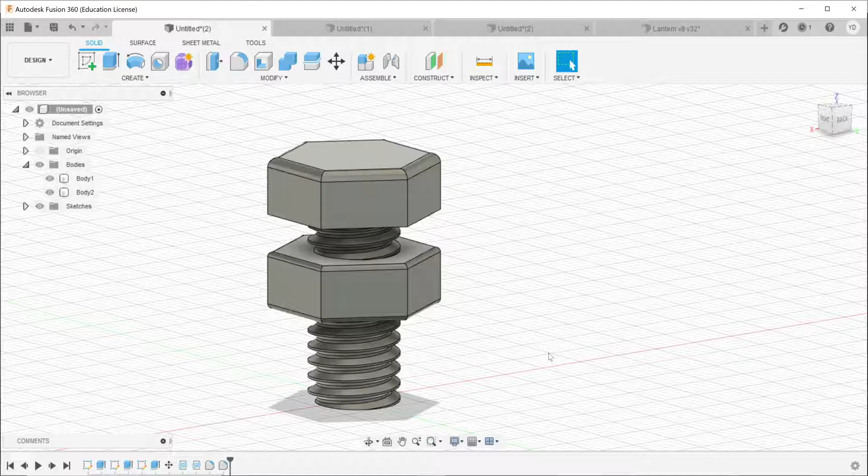Let's start with a circle. I'm going to create a sketch on the top plane, and I'm going to make a circle that's 5 millimeters, and then the height is going to be 10.

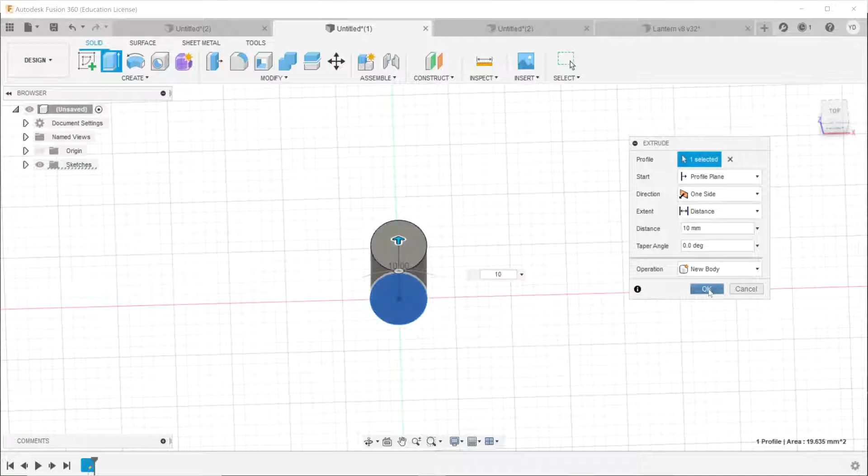I'm going to start with a cylinder, and this is going to be the base of the threads, and then I'm going to create the nut, or the piece that gets threaded onto it.

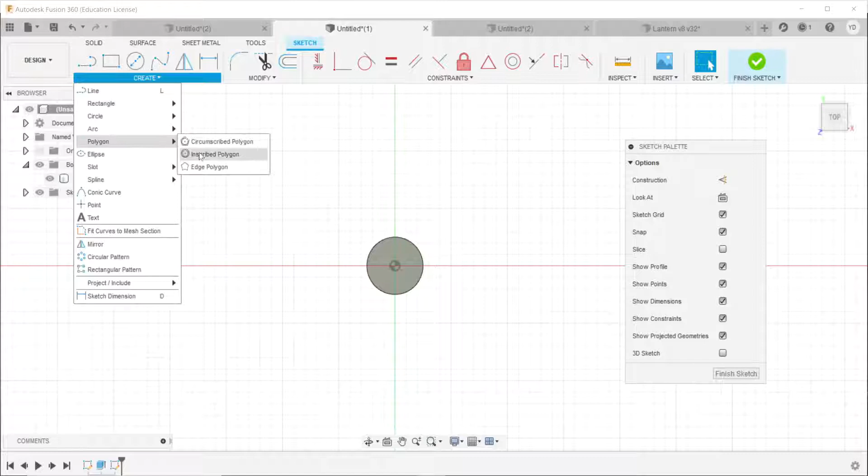Let's create a sketch on top of the cylinder, and I'm going to make a polygon that's a hexagon. I'm going to go to polygon, inscribed polygon, and use the center point to create a hexagon. But I'm going to want to extend this a little bit further.

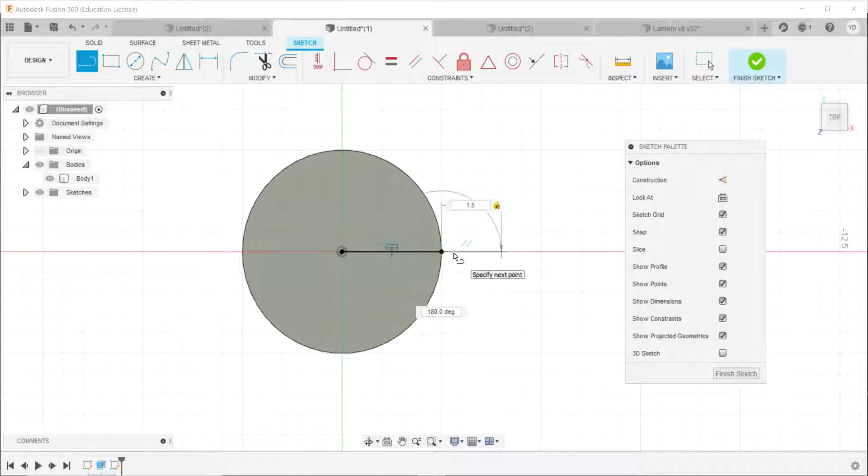To make it a little bit more precise, I'm going to create a line from the center of the circle to the edge, and then go another 1.5 millimeters, and that's where my hexagon is going to extend until. So let's go to create, polygon, inscribed polygon, center of the circle to the edge, and that should be good.

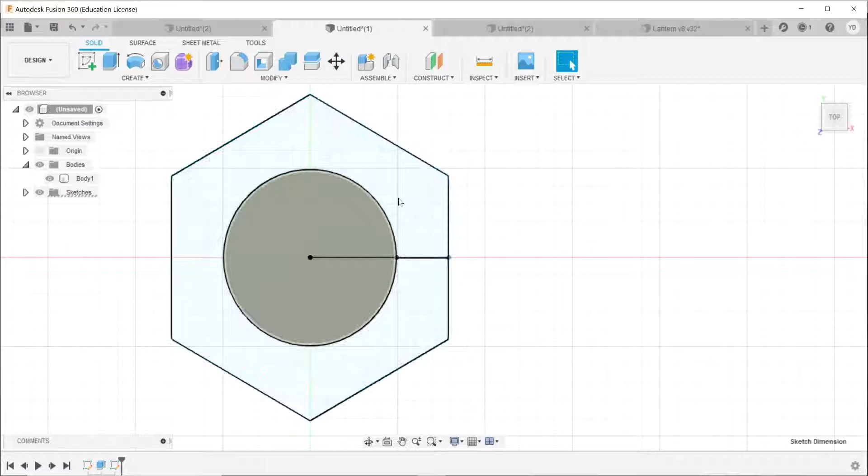I'm going to hit finish sketch, and then extrude this hexagon upwards, 3 millimeters, and hit OK. So now we have the nut and the base that we're going to thread together.

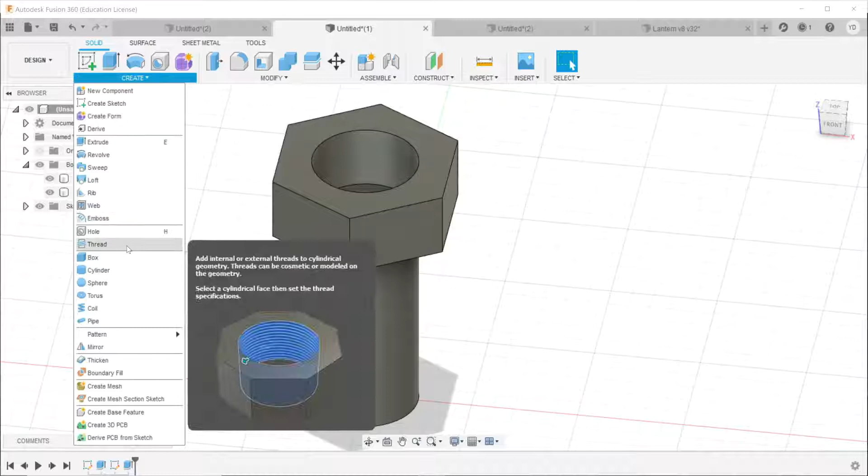Let's go to create, and let's go to thread, and then I'm going to select the outside of the cylinder, and you can see the thread design appears.

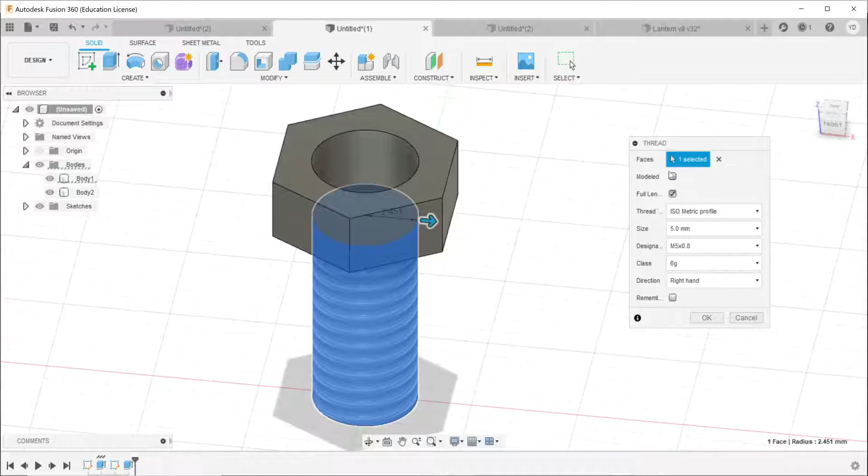But if we wanted to actually 3D print, we're going to have to check modeled. I think this happens because for Fusion 360, in order to save memory to make it run quicker, it doesn't by default show it. So in order to 3D print, we have to click on modeled.

You can see it's an M5 by 0.8 screw or thread. Because it's 5, we made a circle that's 5 millimeters. There's a lot of different metric profiles, ISO metric, based on your needs, but we're going to stick to the ISO metric. All the other settings look okay, so I'm going to hit OK.

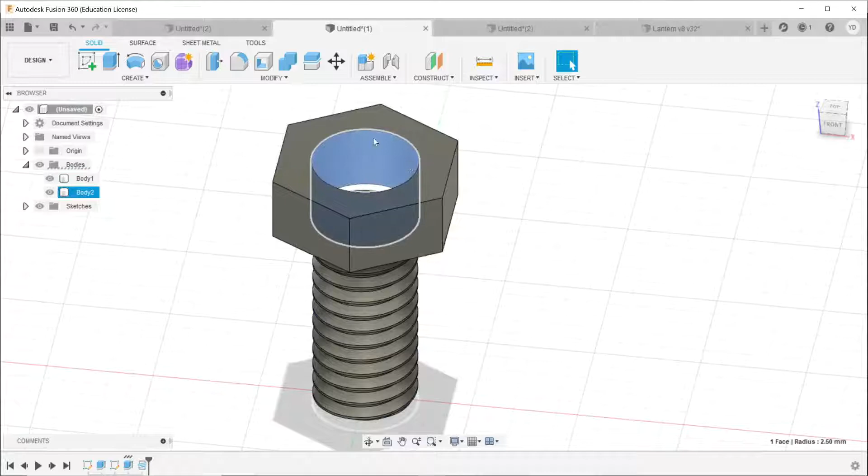That will apply the threads. I'm going to do the same thing to the inside part of the nut. Let's go to create, thread. Check modeled again, and it should be the same designation, M5 by 0.8.

That'll ensure that they're designed to come together. So let's hit OK. There are the two pieces that are going to get screwed onto each other.

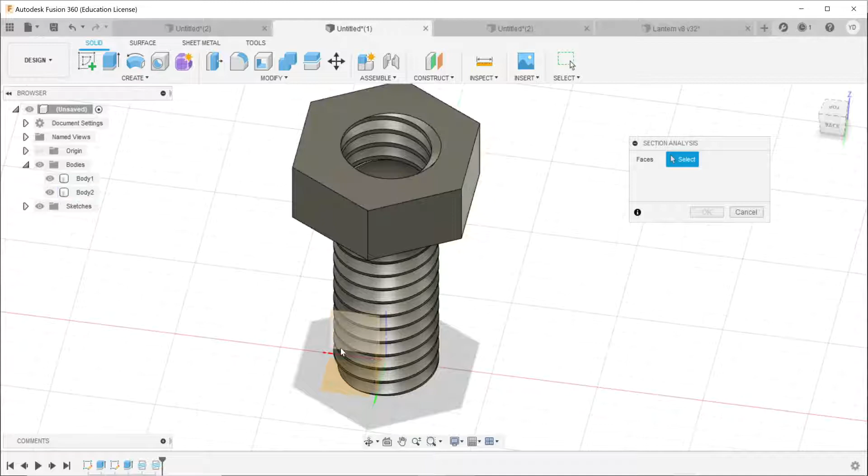But let's look at a section analysis to see how they actually come together. We'll go to inspect, section analysis, and what it's going to do is create a cross section of whatever we want in order to get an inside look at it. So I'm going to click on this plane, and you can see what it looks like on the inside.

Let's hit OK. I can turn off section analysis as I want as well, but it's a useful feature to really look at your designs from the inside.

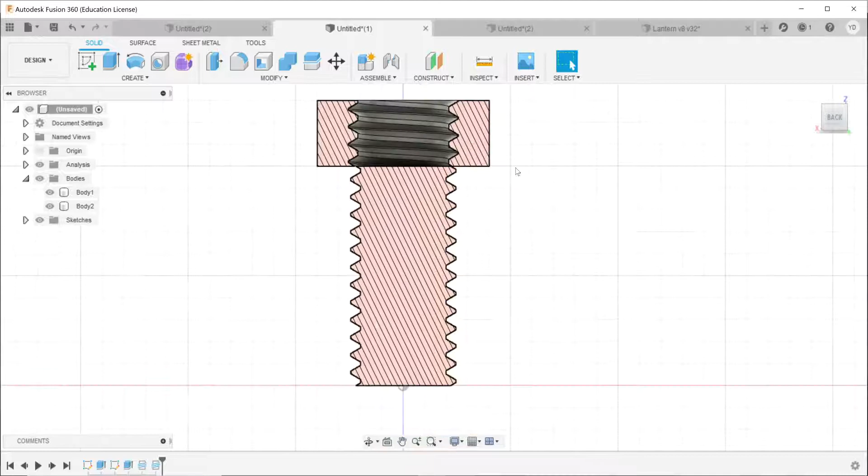So what I'm going to want to do is take the nut part, which is body 2, and just move it down to see how well it aligns with the threads. Perhaps maybe something like this. I'm going to hit OK, and you could see that there's a little bit of a clearance.

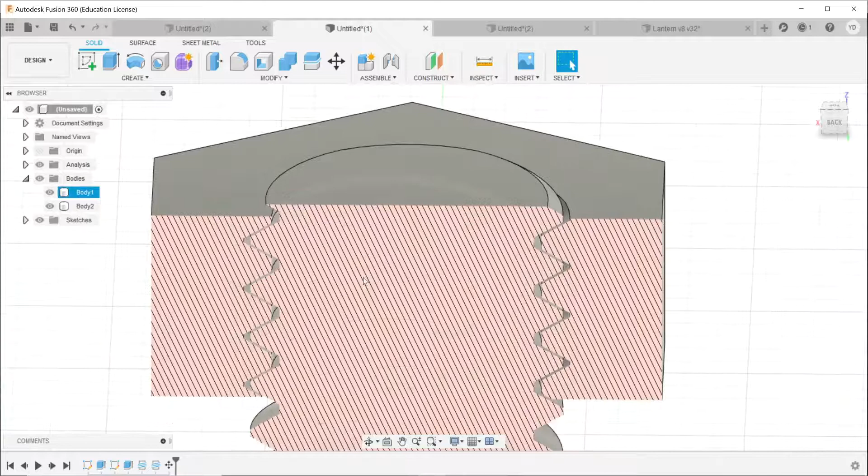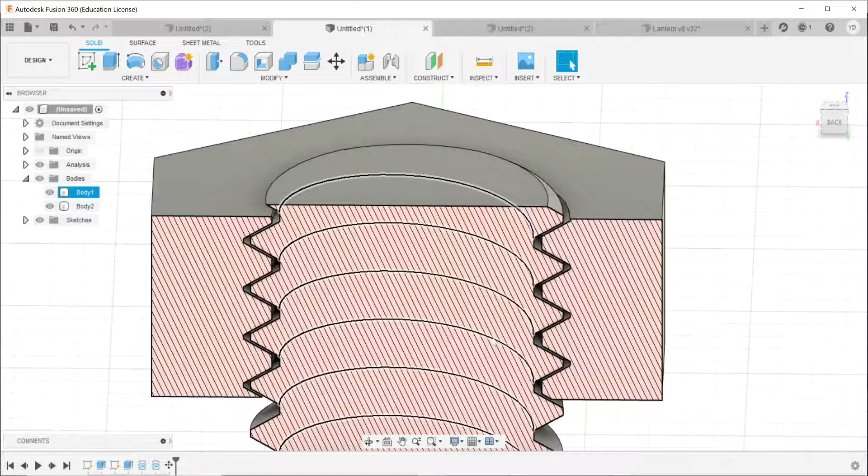I think by default Fusion 360 gives you 0.1 millimeter clearance, which if you have a very precise 3D printer, it might come together. I've never had personally much luck with this. So what I do is I can scale one of the pieces to make it smaller in order to make sure that they actually are able to thread onto each other. Otherwise, from my past experiences, they're not able to come together because of the tolerances of the 3D printer.

So let's scale either the outside piece, the nut, bigger, or scale the inside piece smaller. That's what I'm going to do. I'm going to scale the inside piece a little bit smaller.

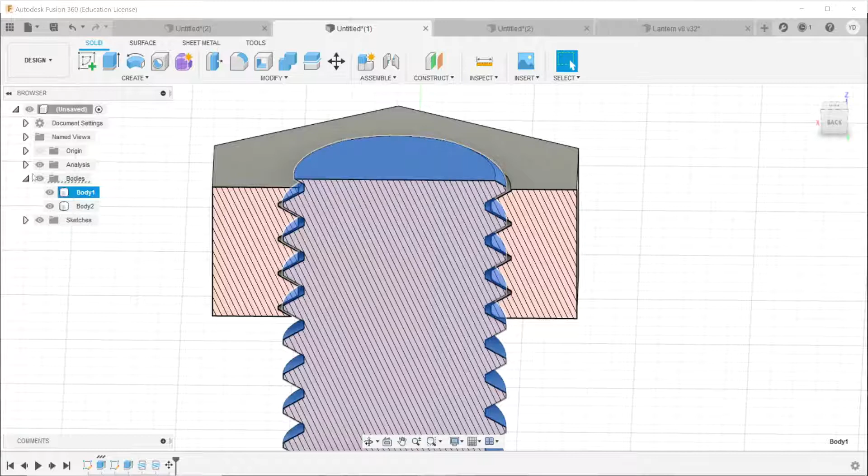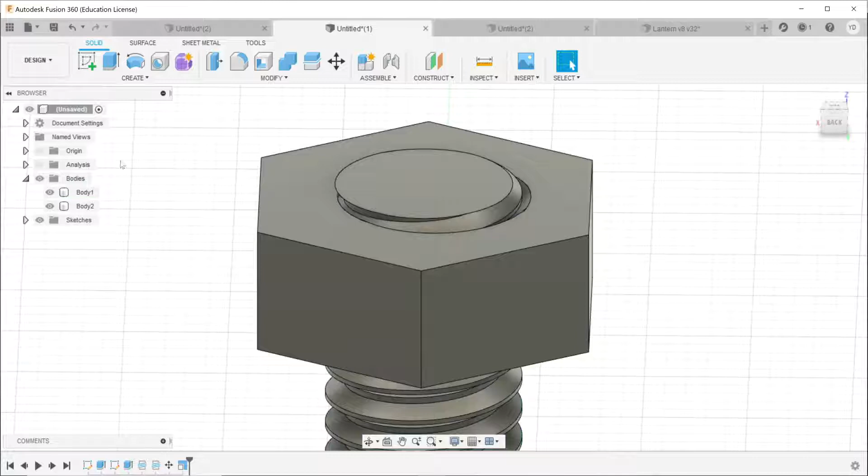That's body 1. Let me turn off analysis for this, and I'll take body 1, go to modify and scale, and use a little bit of a smaller scale factor. So 1 is full size. I'm going to scale it down by about 3%, so I'm going to use 0.97, and hit OK. Let me turn analysis back on, and I'll see if I can arrange it again in order to see how it fits.

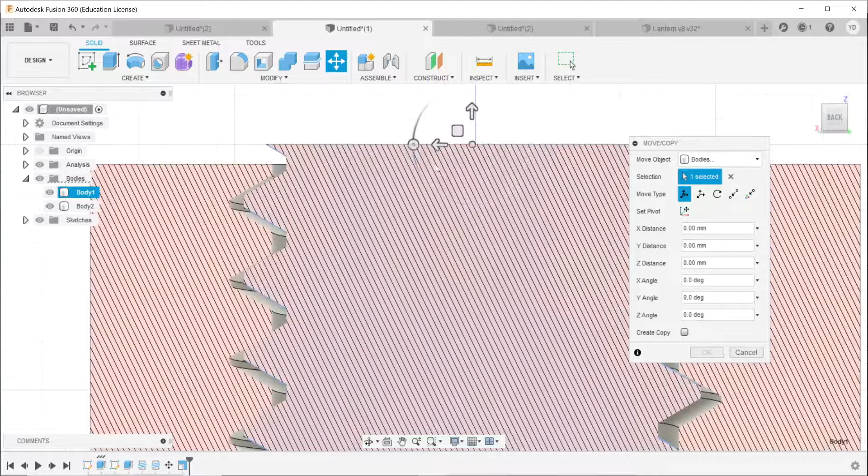So I'll put my axes. Let's go to a good view. I'm just trying to arrange it so I can move it correctly. Perhaps something like this. What this should do is give me a little bit of clearance to make sure the piece is able to thread correctly.

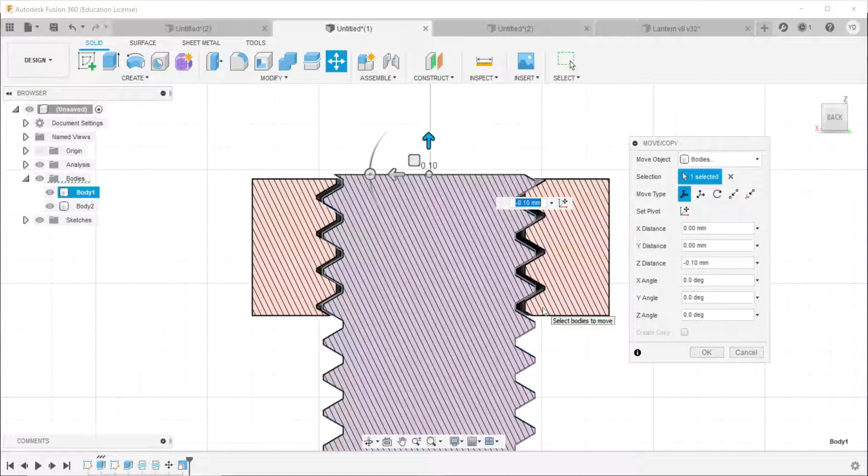This also depends on how big of a piece you're making. If you're making a very big piece that gets threaded, you might need to scale it a little bit less—so instead of 0.97, you might do 0.98. Whereas if you're doing something small, you might have to scale it a little bit more. So it's important to be able to test print.

The other thing to be aware of is scaling something scales just that one piece relative to each other, so there's a chance it might not align anymore after scaling. I've had a lot of success using this strategy, but...

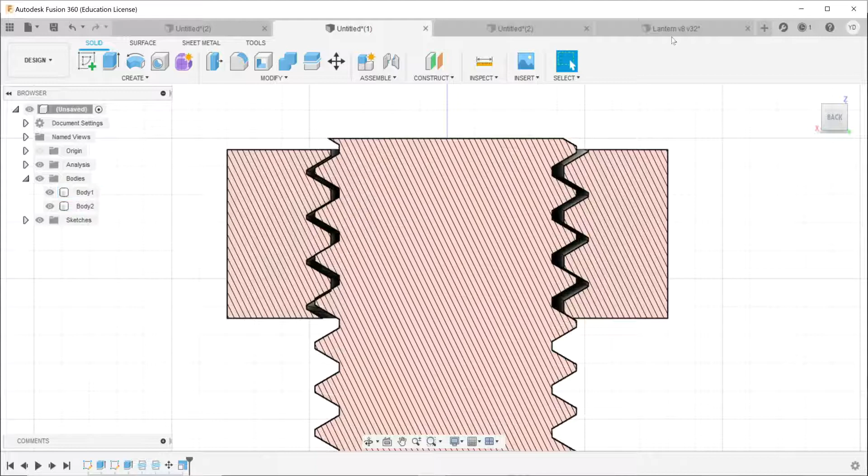Also, sometimes if you are making a design that is not a simple nut and screw—for example, this lantern design threads the base onto the main part of it—I likely wouldn't want to scale either part in order to adjust. I'm just going to want to make sure the threads fit in their own right. So that's where the second technique could be useful.

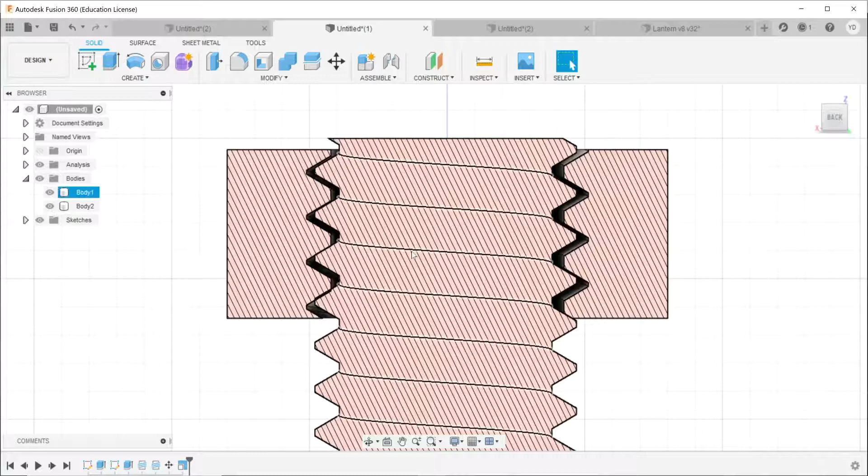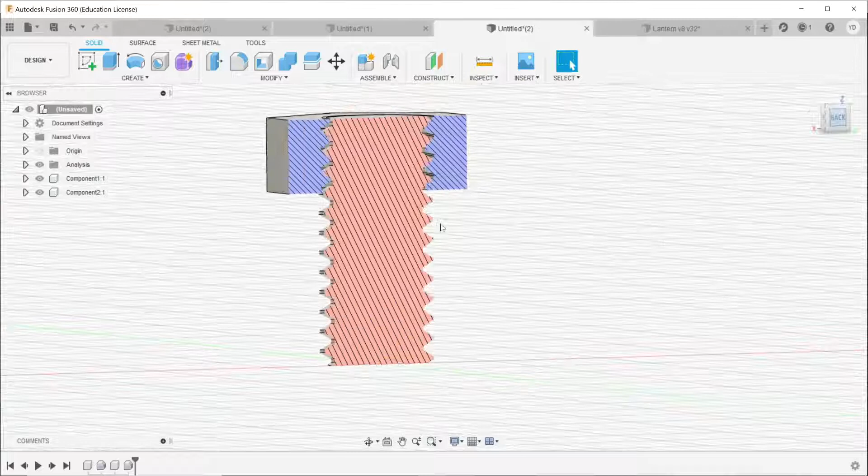I'm going to turn analysis back off, and this is the design that I had from the previous one before scaling. Let me go back to my section analysis, and I'll hit OK. Let me align it, and then I'll show you the other technique you can use. I'll take component 1 and move it to get a decent alignment with the threads, something like that. Hit OK. The other technique is to offset the inner threads—to offset the threads of the screw.

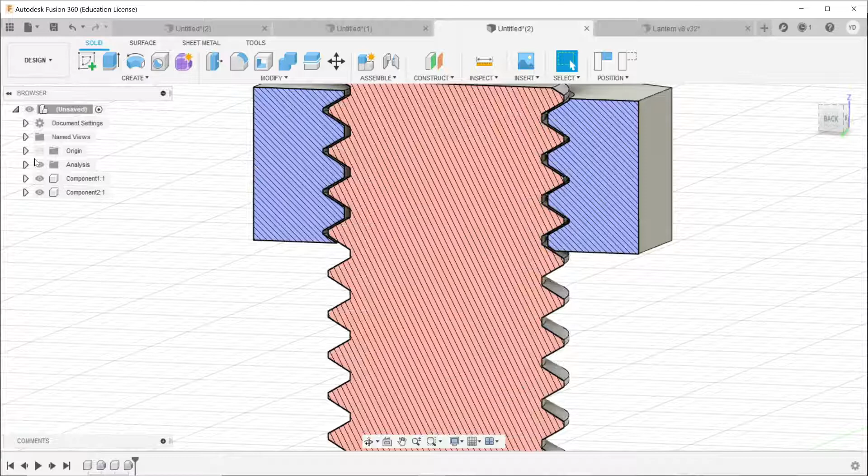In order to do that, let me turn analysis off. It's under Modify and Offset Face, and I'm going to take the top part of the threads, this part right here. Let's click on it, and since Fusion 360 by default gives you 0.1 millimeters, I'm going to do another 0.1 millimeters, so it's offset by 0.2 instead of 0.1. I also want to make it smaller, so it's going to be negative 0.1, and you can see that the faces are brought together a little bit more.

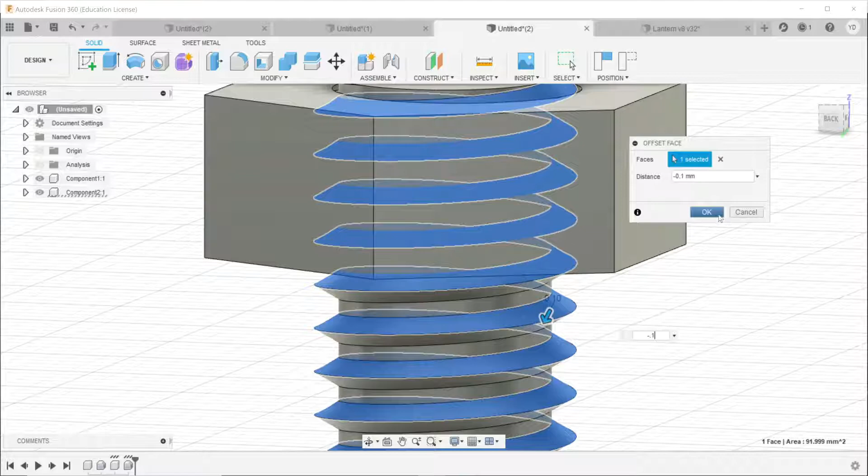I'm going to hit OK, and let's turn analysis back on. You can kind of see that it aligns well, and there's also more clearance there. So that's another useful technique when designing threads.

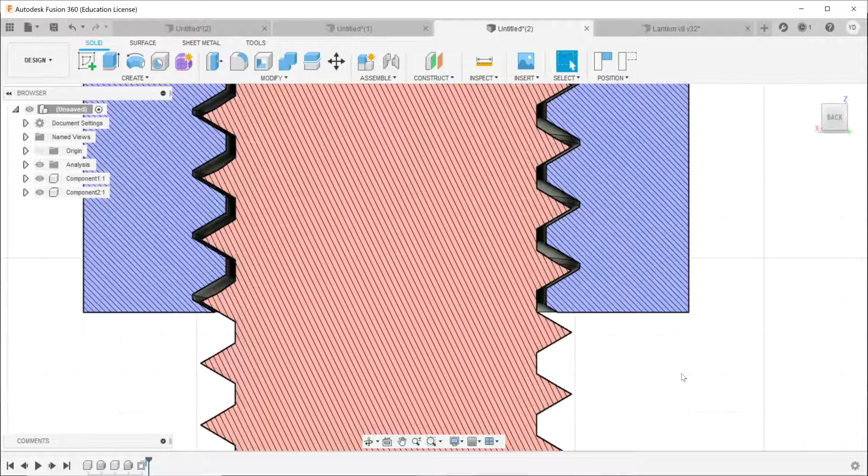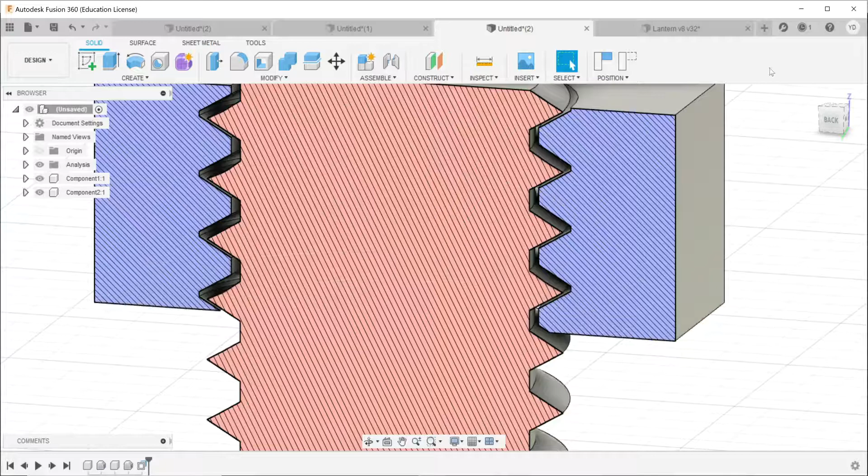At the same time, there's a drawback to this. If you look at the sharp edges now created by offsetting, it has a tendency to sometimes degrade the threads because you're working with softer plastic when you 3D print. So it might be useful to give it a little bit of structural integrity if you use this technique, and that's a pretty easy thing to do if you fillet these corners away. Then you'll have to fillet the nut part or the other part that screws on as well. So let me show you how to do that.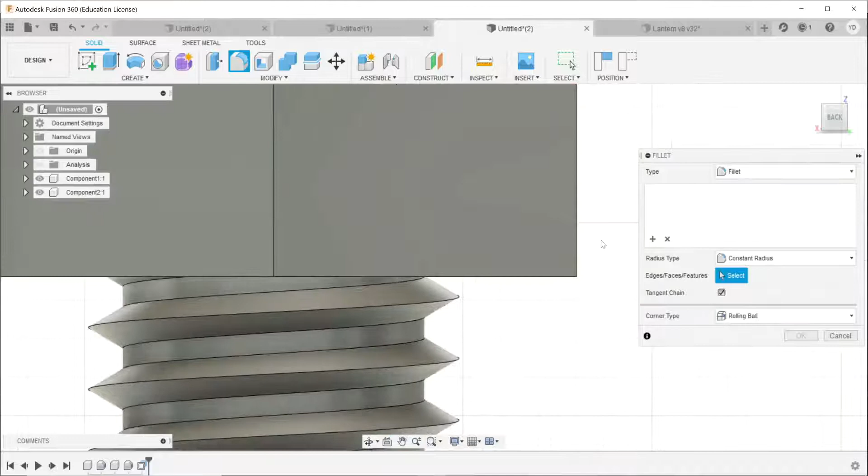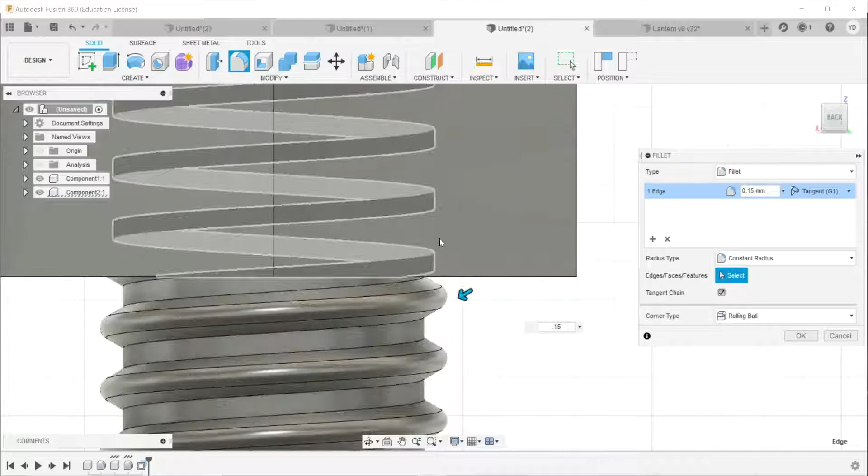We're going to go to Modify and then Fillet. Let me turn section analysis off again, and what I want to fillet is that sharp corner. I'm just going to use something pretty small—0.15, between 0.15 and 0.2, I think is enough to round it off, but at the same time not overdo it and have a noticeable difference in terms of it actually coming together the way you want. So 0.15 will be okay.

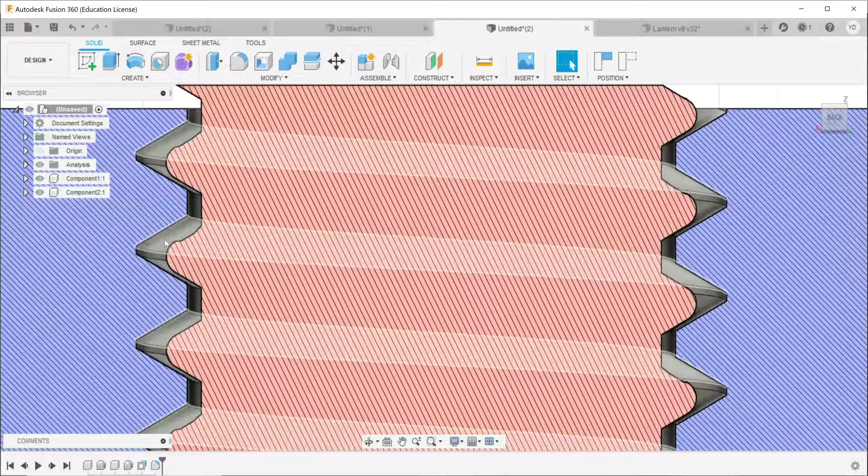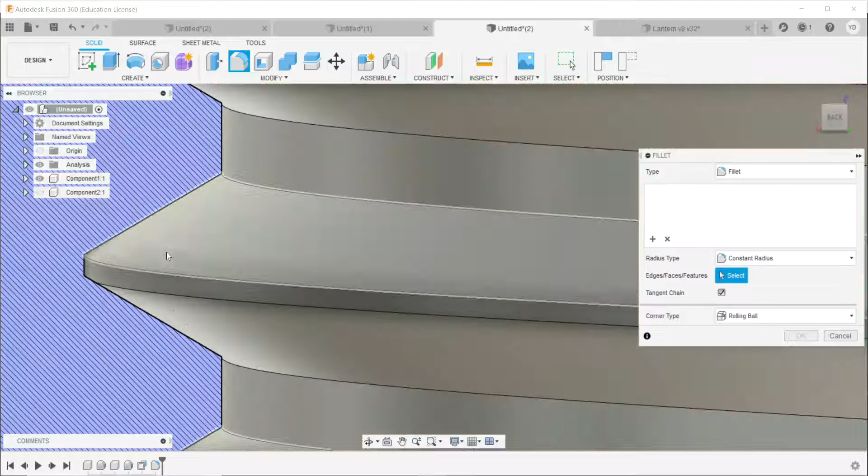Under analysis, you can see it's rounded off the corners, but we should probably match the outer threads to this as well. Let's do that—I'm going to go back to fillet and select two parts of the inner threads. Let me turn off component 2, and I'm going to select this part. I'm going to hit Control and select that part as well, and it's going to select the entire length of the threads, which is what I want.

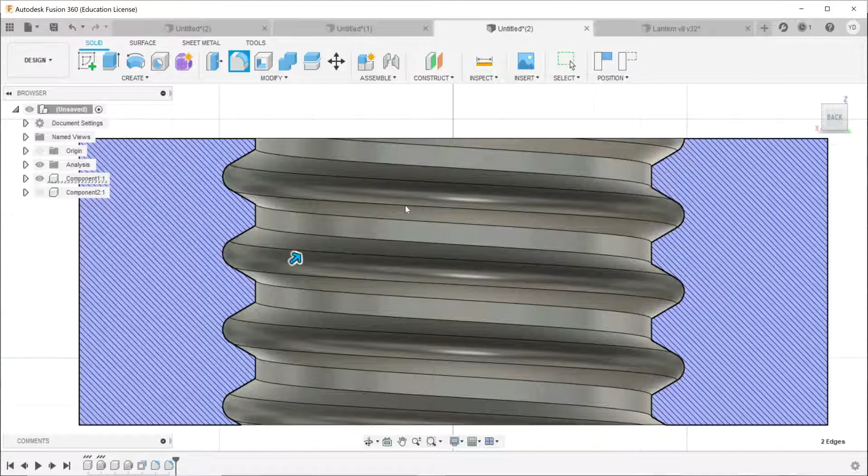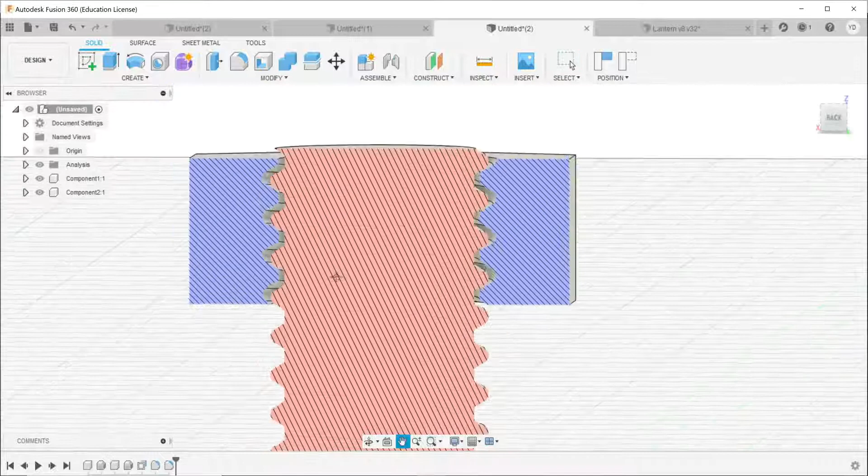I'm going to match the fillet from the inner thread, so I'll go 0.15, let it do its thing, and hit OK. As you can see, we've also filleted the outer piece to match. Let's turn on component 2—I think that looks good for a test print. The big variable is the size, so it's important to test print it to see how it comes together in real life.

But those are two easy techniques for designing threads in Fusion 360.